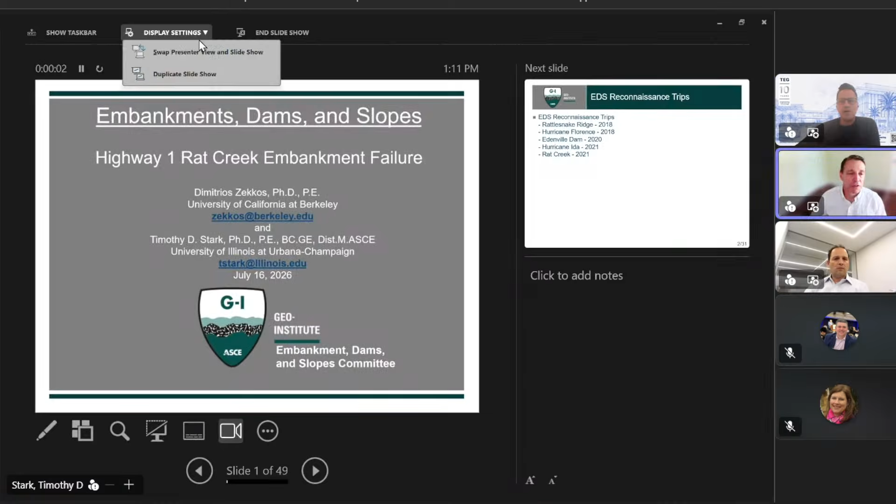Okay, I'm going to start off and give some introduction, then turn it over to Dimitrios, and I'll come back at the end. So here we go, Highway 1 Rat Creek Embankment Failure.

As I mentioned, the Embankment Dams and Slopes Committee started conducting reconnaissance trips when I was chair of the committee. Our first trip was in 2018 to Rattlesnake Ridge near Yakima, Washington, still a very active and large landslide. Next was Hurricane Florence in 2018, Edenville Dam in Michigan in 2020. And I think, Dimitrios, you were also involved in that one too, right?

Yes. And then in 2021, Hurricane Ida, and also in 2021 the Rat Creek embankment failure that we're going to talk about today. So that's how we got into reconnaissance trips through the EDS committee. We were really focused on embankment, dam, and slope case histories, and Rat Creek is one of those.

Okay, so here's the outline for the presentation. Right there, 2, 4, 6 bullet points. And here's the cover page of the GSP.

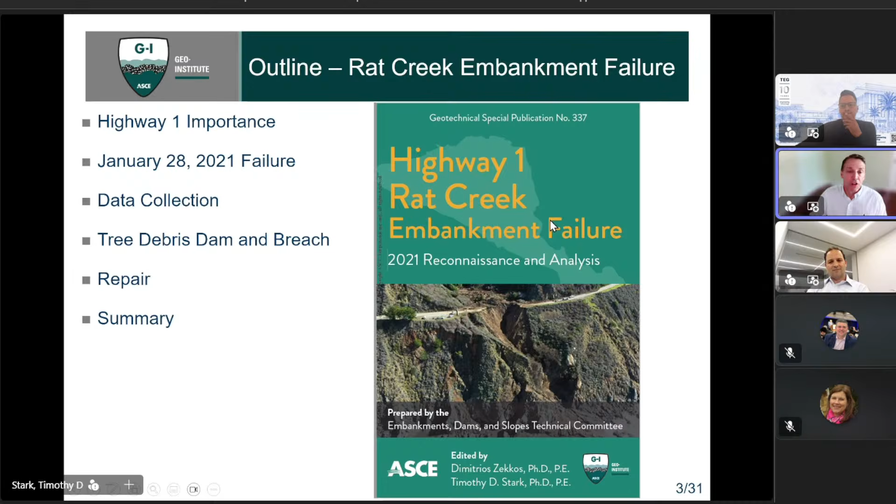So one reason we were very interested, I was working on a project with the USDA on cascading hazards, and I think Dimitrios was also working on similar topics. And Rat Creek presented a unique combination of cascading hazards, and started with the Dolan fire right here in red. And then after the Dolan fire came a large precipitation event called an atmospheric river.

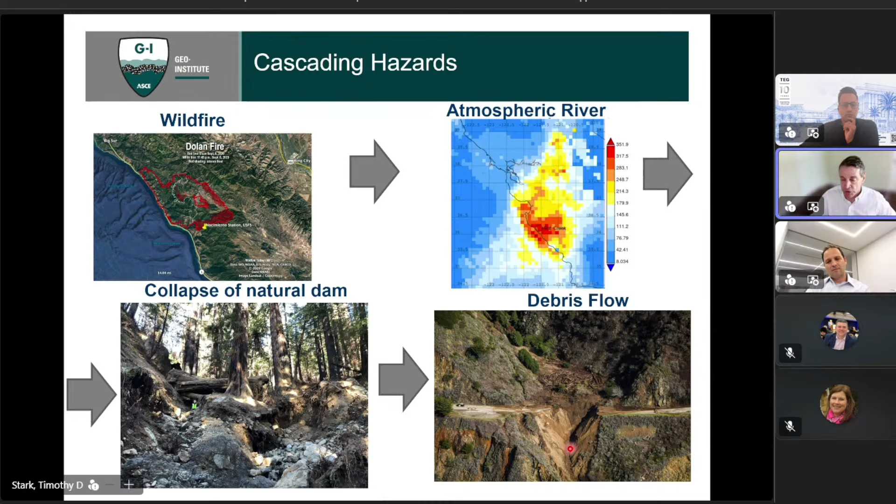And that led to collapse of a natural tree dam, which Dimitrios will describe in more detail, but you heard that right, a tree dam. And the breach of that dam led to a major debris flow overtopping Highway 1 and eroding the embankment supporting Highway 1 you see in the lower photo. And so, Dimitrios, I'll turn it over to you.

Sure. Yes, absolutely. So this is the team that contributed; we're the two presenting today as the co-leads of that report. But everybody that you see here participated in the field. I'm not going to mention them by name, but you can see them, and they contributed to this report. And it is a team of engineers and geologists and also representatives from Caltrans, Ryan Turner for sure, a number of students also. And so what you see today is kind of the outcome of all these people's work.

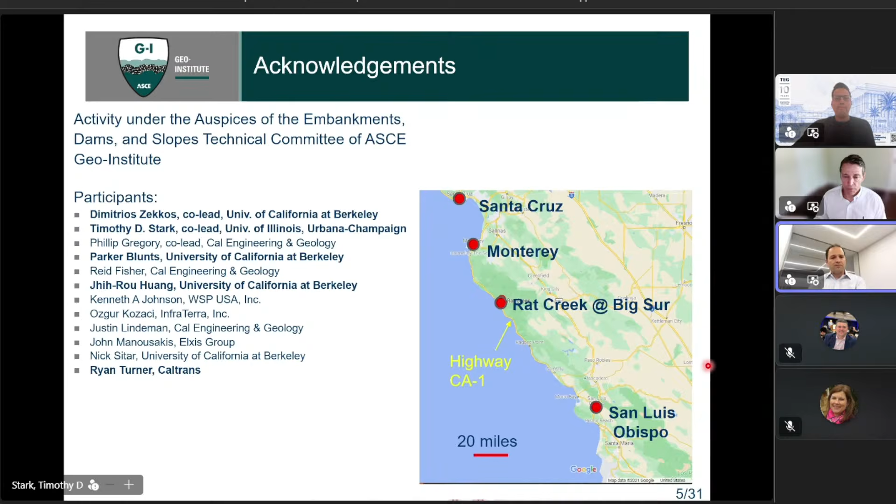And this map also has the location of Rat Creek, basically along Big Sur on Highway 1 between Monterey and San Luis Obispo. Yeah, I can go to the next one maybe. And feel free to jump in on any of those.

But talking about what we think we see versus what happened. On the top right is the figure you will see in CNN and other media when the failure happened. And when I saw that, I thought I was looking at a wedge failure, the type of thing we see in rock mechanics, and said, "Oh, that's a fascinating wedge failure." Had nothing to do with what actually happened in the end, as Tim kind of described. And we know that for a fact because there are photos actually.

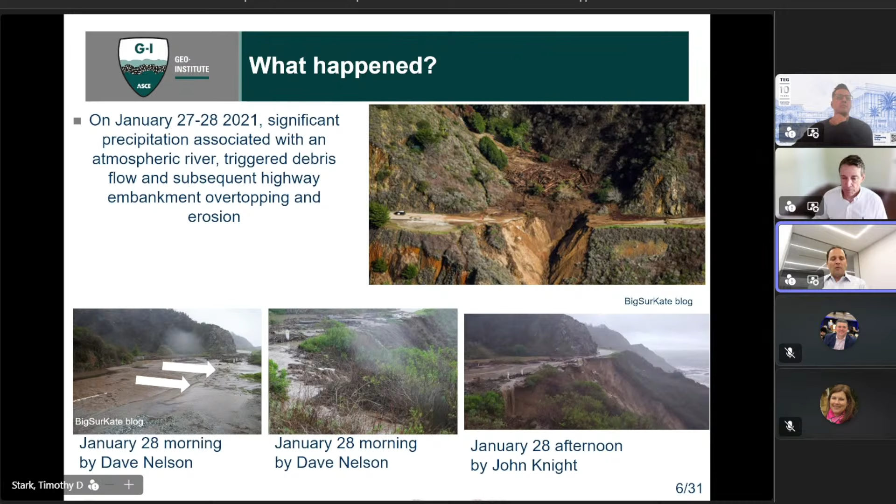As we started getting involved, there were photos of the overtopping of the embankment and the gradual washout. So we have a number of photos as the roadway was washing out; as the rain fell on top of the embankment, it was eroding it gradually. And the photos at the bottom show that. The next slide. Yeah, and these photos are showing actually the erosion. Yeah.

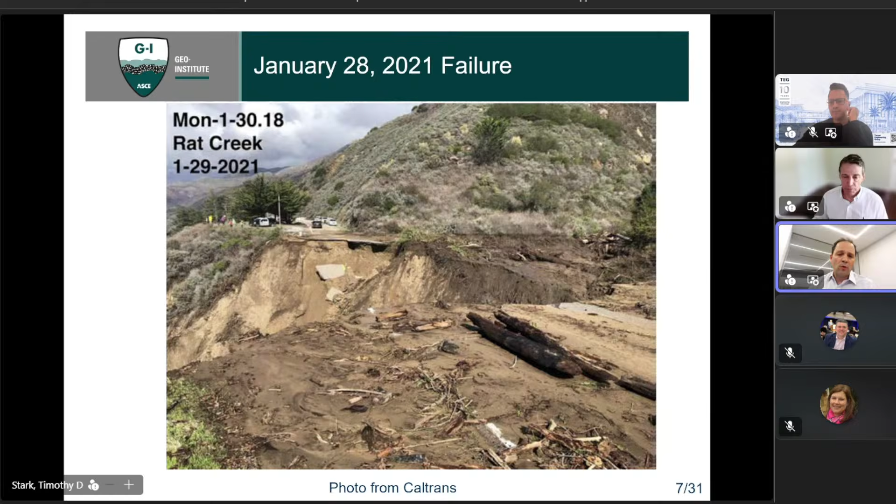And so these are just some more pictures. This is what you will see afterwards. This is a photo from Caltrans after the failure. The next slide also shows another view of that. And then as you get closer, you can clearly see the erosion marks. You can go to the next one.

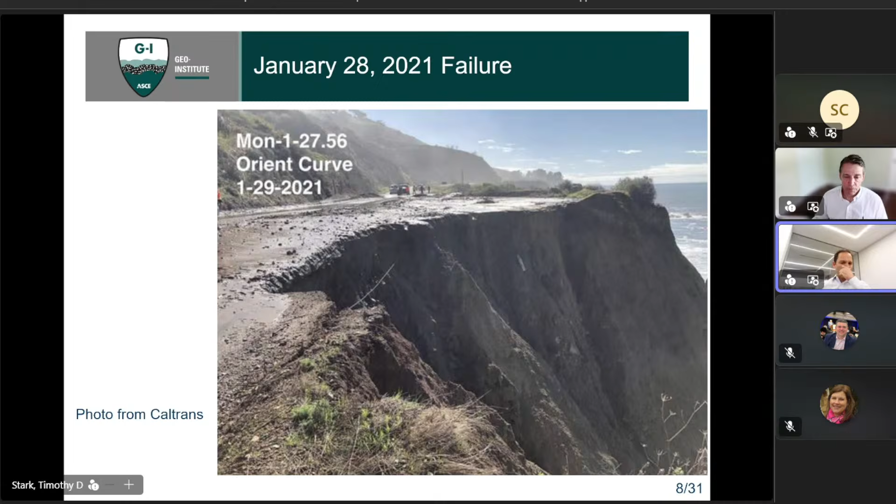And this is like the overview. So if you start paying attention back to this photo, which, as I said before, looks like a wedge, there is all this debris in the back of that washout. And you may not have noticed, but there are all these wooden tree trunks that really piled against the road. And that's definitely part of the story. So we'll talk about that next.

So if we go to the next slide, the first thing we did was to understand what failed, what moved, what happened. These are techniques that we extensively use nowadays: we basically used UAV structure from motion and some pre-existing LiDAR data. So there was LiDAR data before the event.

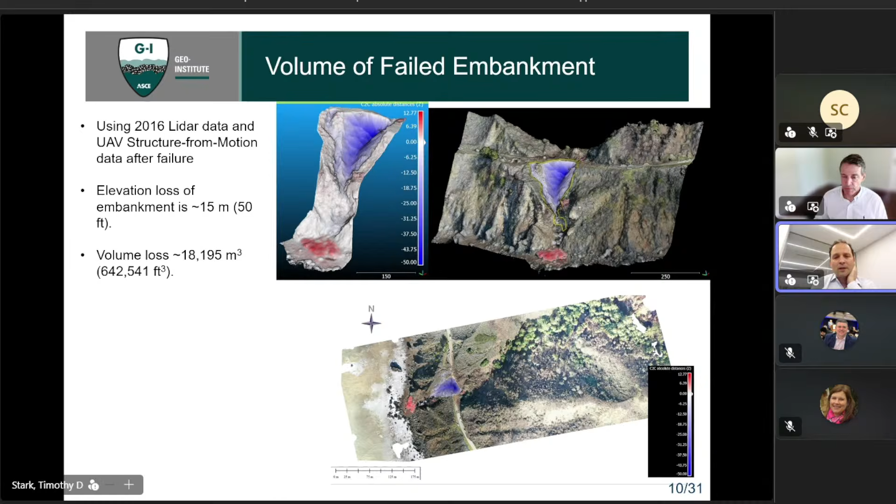And if you take the difference between the 3D models created by these two techniques, you can actually calculate volumes and dimensions. And so you can definitely see there was significant elevation loss and a total volume loss of about 18,000 cubic meters. And that's what we measured. So that's the facts. And then if we go to the next slide, we can see some of the specifics about what happened that day.

Basically, Highway 1 is clearly closed. Both lanes are completely gone. The highway remained closed for 85 days before Caltrans was able to fix it. And frankly, this was an impressively fast repair in my mind. It did cost, though, $11.5 million. It resulted in a significant detour. You could no longer cross over on that highway, and so that's significant.

And as Tim said before, we knew already that there was a fire in that area. The fire actually had stopped a few months before that event. The presence of a fire-affected area hints at increased water flow and potential triggering of debris flows, overall due to the lack of vegetation and the damage done.

And at the end, the culvert that was below the highway was damaged, and we'll talk about that. And without the presence of that culvert, without the operation of that culvert, the water ran on top of the embankment and started the erosion.

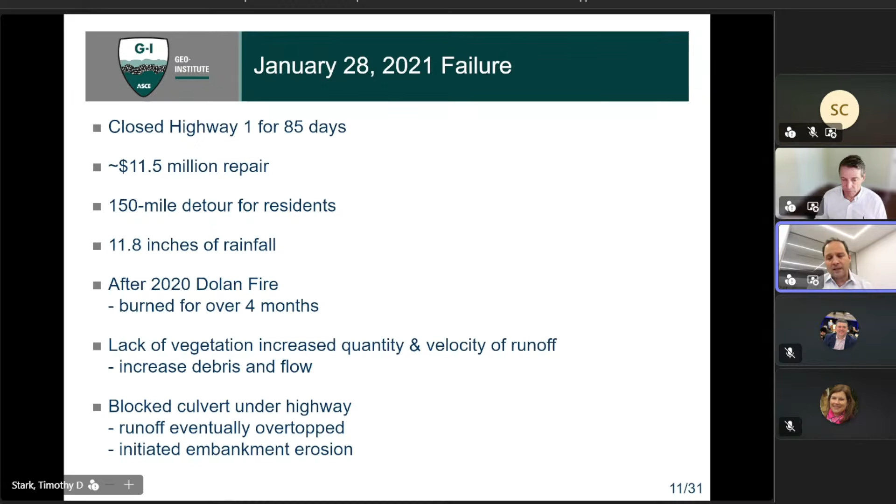But if we go to the next slide, the story didn't start on that day. It's as Tim said, we presented it from the beginning as a cascade, but it wasn't immediately clear at that time, right? And so it's important to think about this when we have an event like that. How rare is it, and did that happen before?

And one thing that had happened in that exact location was in 1985, there was another wildfire, the Gorda wildfire. And actually that one triggered a debris flow at that location. And that debris flow buried the existing culvert that was 66 inches, a very large culvert that was completely buried by that debris flow. That's 1985. And then, you could try to dig everything out and repair.

That's kind of expensive. At that time, Caltrans said, we're going to install a vertical riser, which is 36 inches in diameter, so smaller. And we're going to actually not dig that stuff out, but let the water drop through the riser and find the culvert that is buried. And we will get back to fixing this. In fact, Caltrans had a plan to come back to that location and do what they call a permanent fix. But of course, the events of 2021 happened.

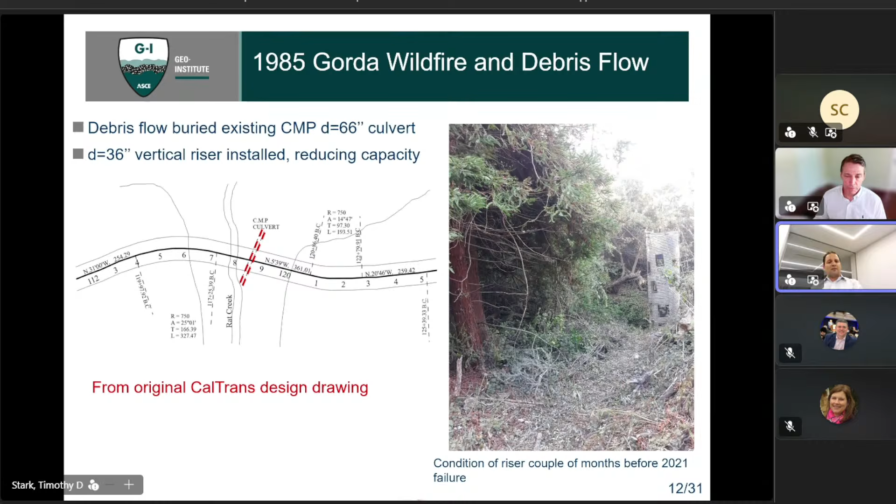And we have actually a photo of that riser just before the failure. It was operational. And so this is the 1985. We go next slide. Fast forward to 2020, the Dolan wildfire was in the news. That was a huge wildfire, covered a very large area, 500 square kilometers. And Rat Creek is on the top left of that affected area, and it was partially, not fully, but partially burned by the Dolan fire.

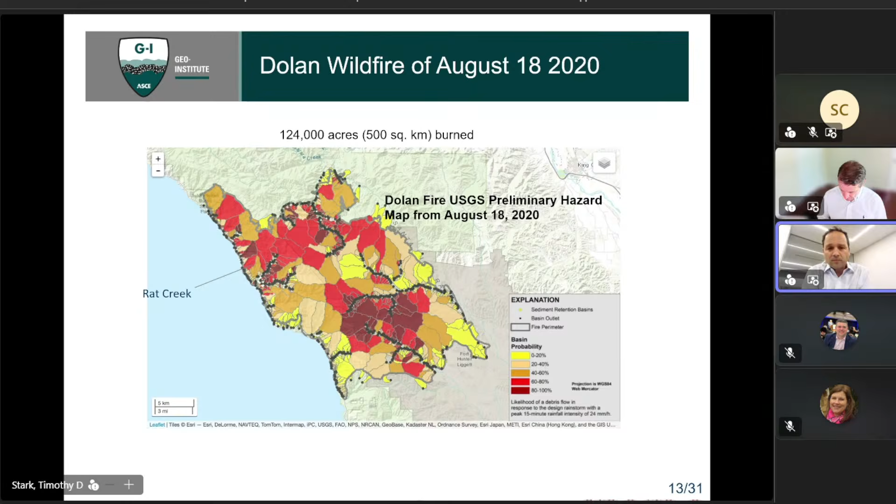And so the event was huge. That happened on August 18. The fire was burning actually for several months. I believe it was controlled in December of 2020. 2 months later, and the next slide, we have an atmospheric river. The atmospheric river is a storm event that affected that area. That atmospheric river stalled on top of this exact location of Rat Creek, south of Carmel.

And we have precipitation data. There's 2 stations that are relatively nearby, plus the IMERG, which is a precipitation data set from NASA that really gives us information about the amount of water that fell on that area during the January 27 to 29 atmospheric river. It's about 300 millimeters, so about 12 inches that fell within a couple of days. And we have a very good time history of that.

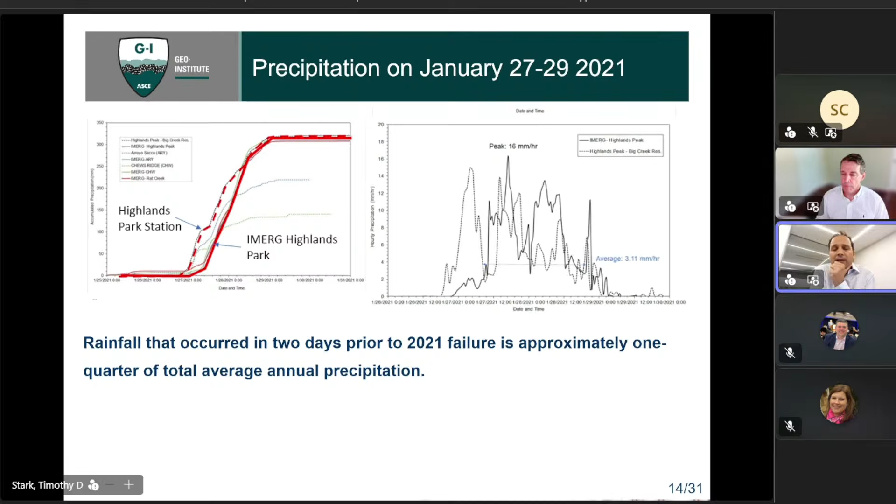That precipitation, if we go to the next slide, fell on top of the wildfire affected area. And so our job was to actually go there and collect data and see what happens. So we can see a few pictures of the data we collected in the next slides.

So the one thing to recognize, and I think it's important from a resiliency perspective, is that in this case, the roadway is on the receiving end of all the action. Things are happening upstream from the highway, and the highway has to be able to handle those. And so the story of resilience is not just about where the highway is, but also all the area that leads to it. And we know that philosophically, but sometimes it's easy not to remember all that part.

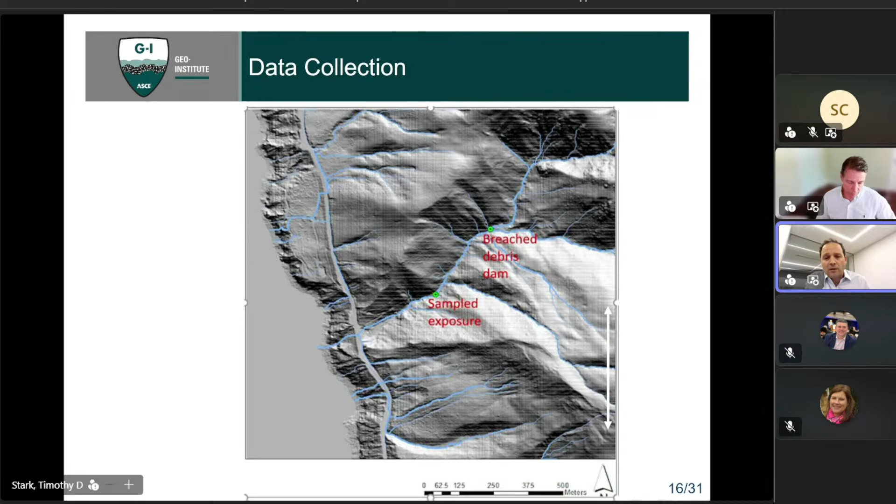So when we visited the area, we started from the highway and headed upstream, basically, to see what happened. As we said, we knew there was a debris flow, and we started heading upstream. So the next slide will show that. This is the heading upstream. This is the highway and the debris flow. We can already see it.

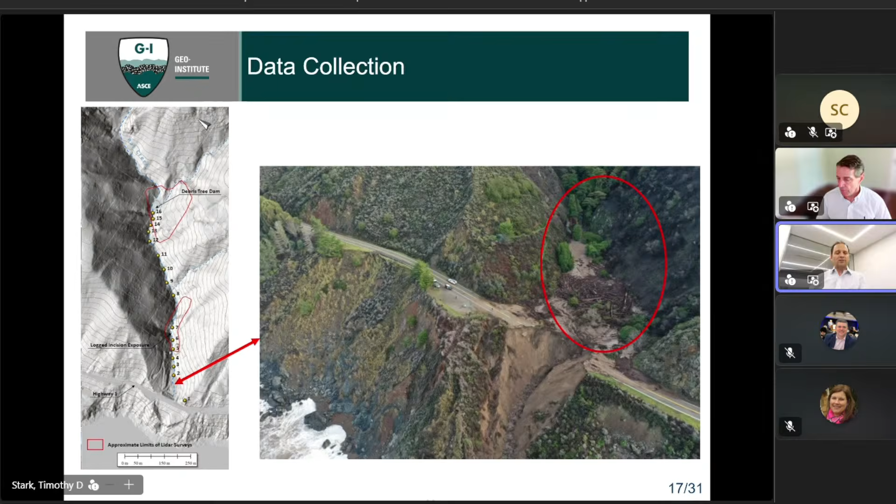The figure on the left shows in the report various stations. We walked all the way to the beginning of the debris flow. And if you do go through the report, you will see lots of pictures about what we have for each of those places. And we have a few slides of that. If we go to the next slide, we're going to start walking upstream of the area. This is very close to the highway, just above where the placement of all the debris came in.

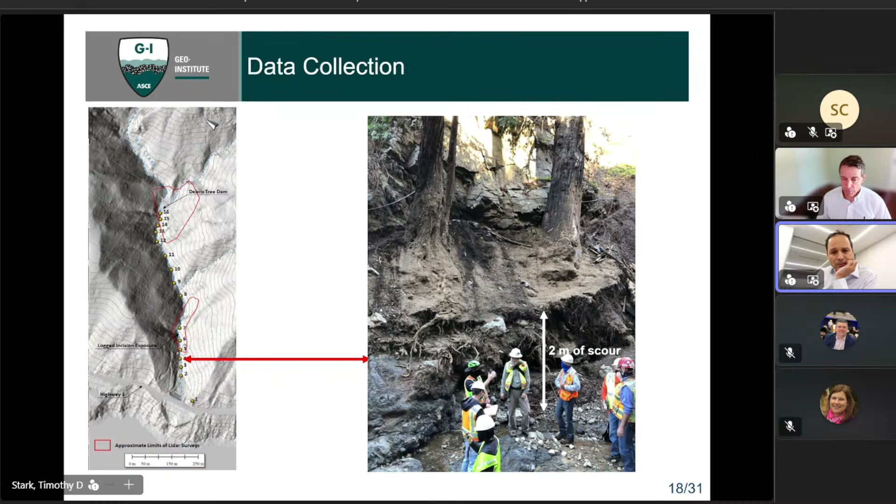And you can already see a 2-meter scour zone, a significant 6-foot scour that took out material from the debris flow. You can see also a cleaned rock at the bottom, the Franciscan melange that is down there, and it's actually very, very visible. So the debris flow took out everything that was placed, the soil that had been naturally placed there. A bit further upstream, if we go to the next slide, you can see another location, a similar story.

There is, again, about a 2-meter, 1.9-meter scour. And what is really interesting to recognize is that we are there after everything has happened. But there is evidence of what was happening in stages in between that phenomenon. You can see, not permanently, but during the storm, submerged portions of this whole area.

And we calculated there was about 3.6 meters of water that was completely overflowing the whole area on top of that scour. And then there were additional several meters where water was splashing. So you can imagine being in that area at that time, very, very scary and very, very high energy and intensity. And we're only seeing the evidence at the end.

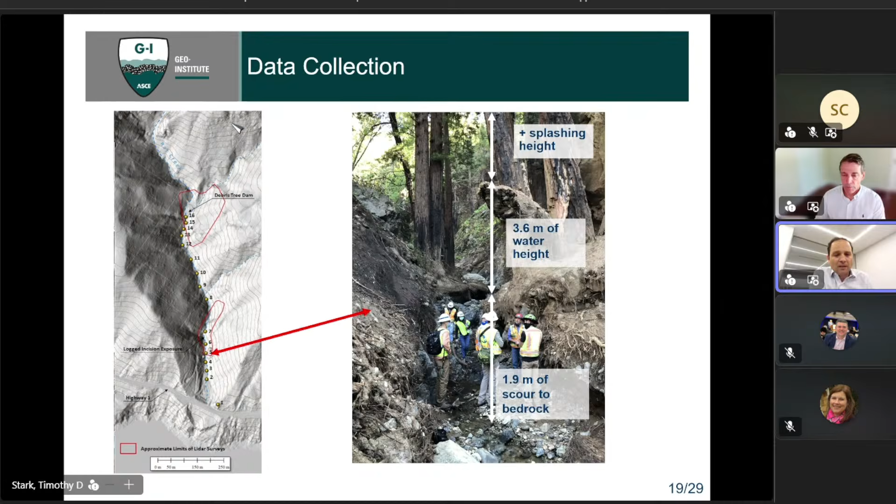Next slide has another station where we were looking at this. This is an example of another place where you can see a tree trunk possibly could have fallen during the storm, maybe not. We don't know exactly, but what we do know is that it was completely submerged. There is evidence of water all over it, and there is debris against it in some places. So we know that this tree trunk that is up there was at some point below water. Next slide.

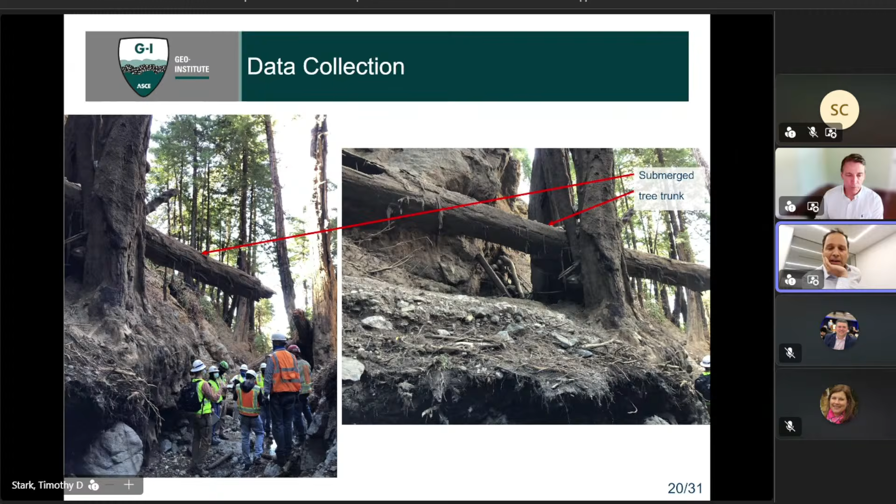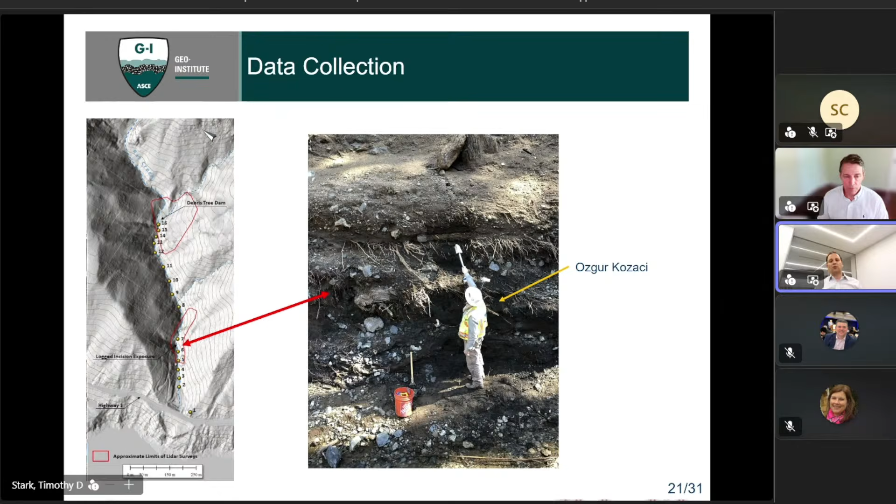This is another station. This is Ozgur Kozaci, one of our team members, a geologist, who did a really great job in mapping. Once you have this section of the soil that has been removed by the debris flow, you can go on the sides and map to see what the story of the soil stratigraphy is. And he did a great job on that. The next slide describes some of his work. We did carbon dating to see the different horizons and how old they are.

I think there are two main lessons from this. Number one is that we found repeated soil horizons, repeated places where there was burned material. So the 1985 fire was not the first wildfire; we have a record going back almost 300 years, and we can see wildfire-affected ground. We could also see flood events, and we were able to date those. And there is a pattern to this.

The most recent flood events are about 36 years apart, which seem to be faster compared to previous flood events. And we can discuss what that means. But maybe we can go to the next slide.

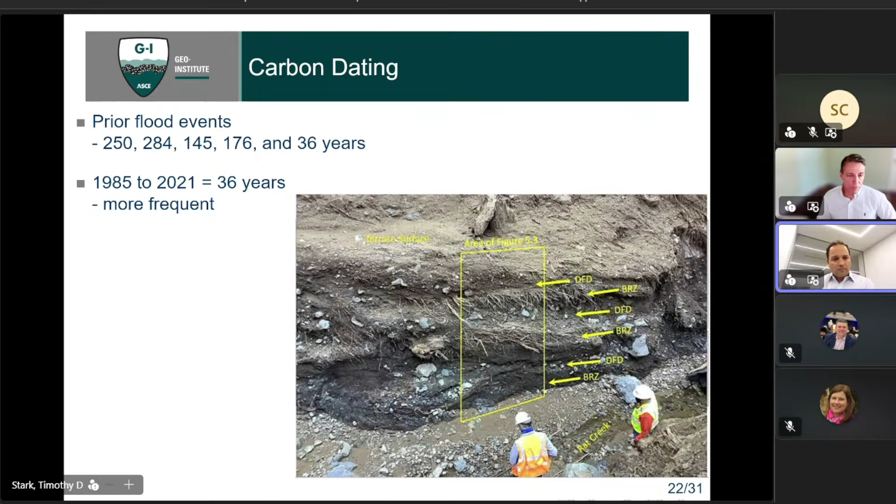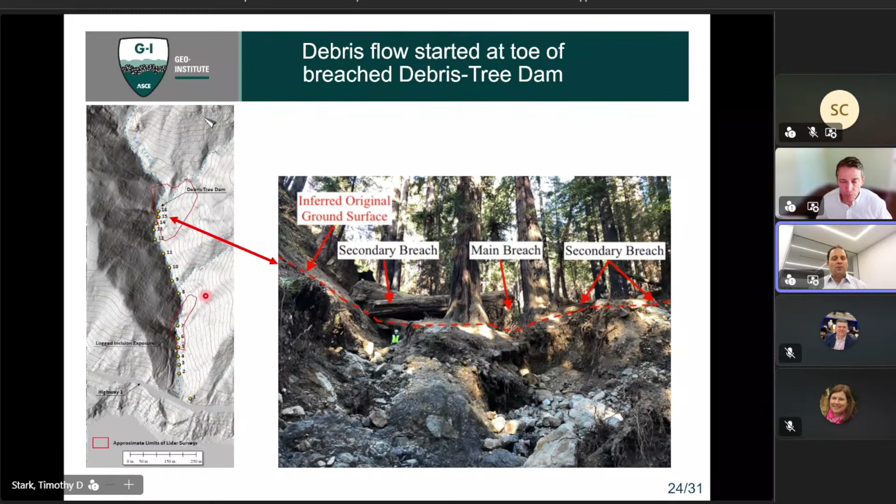As we walked up the debris flow, we wanted to go to the beginning of it. We thought we would find a typical scar of the initiation of the debris flow, but that's not what we found. What we found was a naturally placed tree debris dam. Tim, you can go to the next slide. That tree debris dam was pretty big. It was damaged by the time we reached it.

This is a picture, if you can see it. We're going to have some annotation. But it was damaged, so it was broken. And the location where it broke is exactly where the initiation of the debris flow is. You can see already here some of the tree trunks. Maybe the next pictures will make each of those a little more visible.

But what you can see here is at least 3 different breaches: the primary, main one, as well as 2 places where water was definitely flowing below the dam, but that were not the main place where the dam broke.

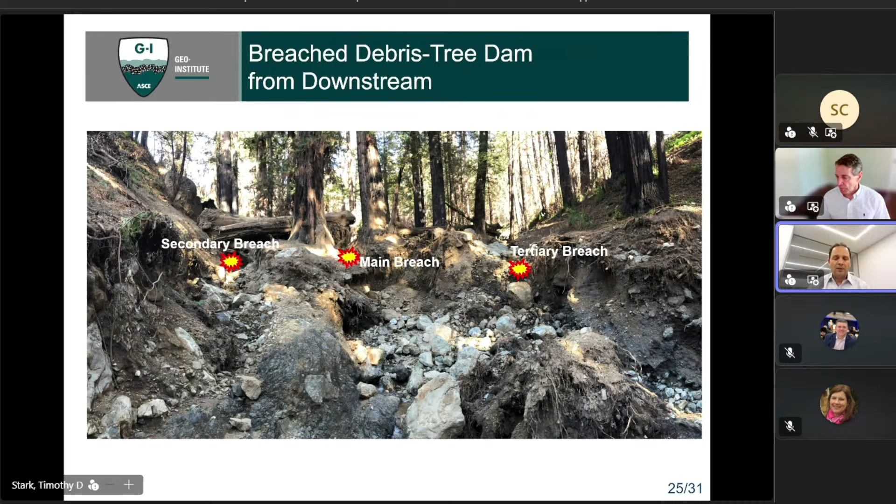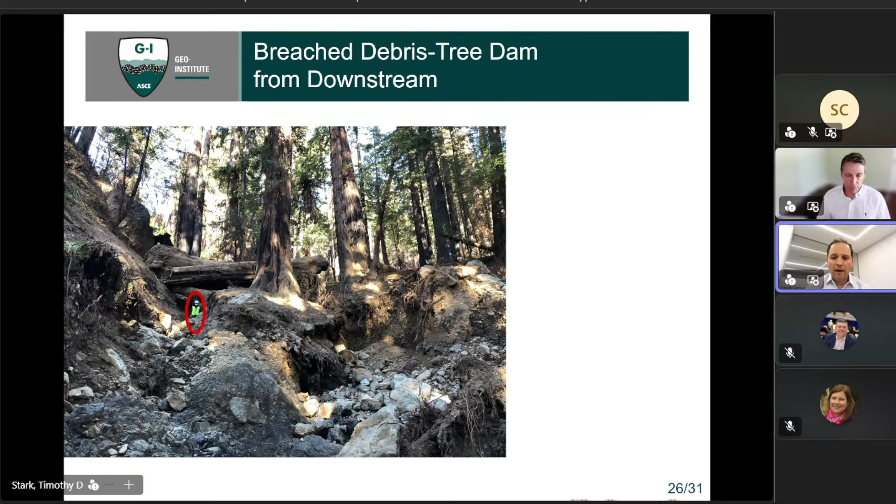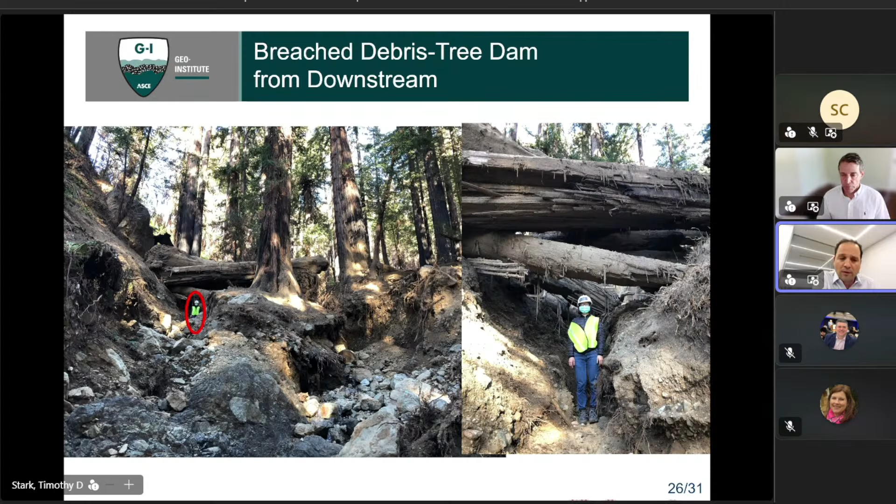Maybe the next slide will have more photos related to this. You can see here a close-up view of some of these tree trunks, some of them easily reaching 1.5 meters in diameter. And Jiru is standing in one of the secondary breaches, not the primary, where the water has flowed below the dam. Next slide.

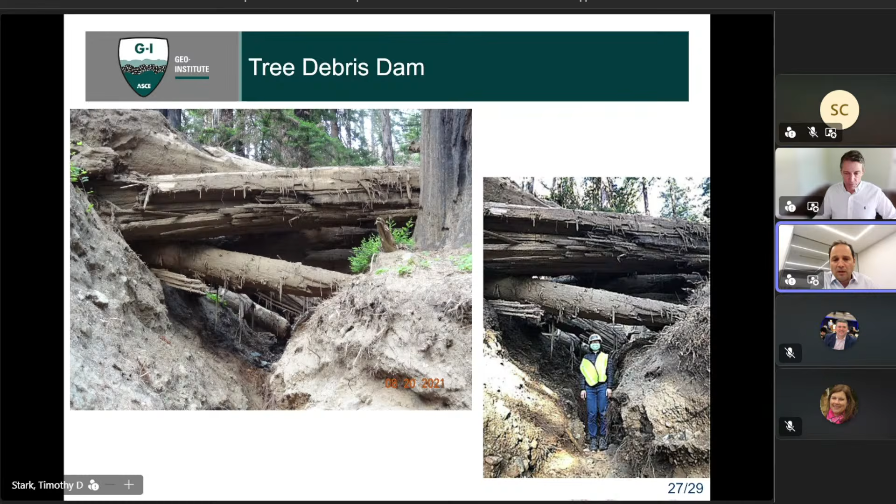These are additional pictures that maybe give you a better sense of the dam. It's easy to think about how much energy would have been necessary to really break the dam in the main location where it broke. Maybe the next slide.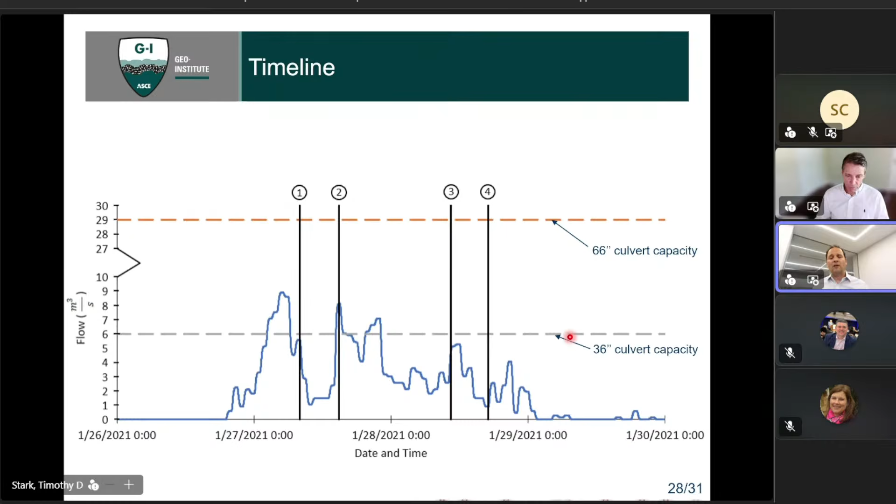And what you see here is the capacity of the original 66-inch culvert, what it could handle, the orange, that no longer was operational. But you can also see with the downshoot, the riser, the 36-inch capacity. So in a perfect world, if all the water was below the culvert capacity, we would have no problem. And we have a problem. But the reason is not actually that the 36-inch culvert capacity was a bit too low for that event; if you can click the next theme, it's really that the debris flow took out the culvert.

And so already we know by that time that the culvert, the riser, no longer exists, so there is no capacity. And so from that point on, if you click again, Tim, the water is rising. We know it rose by 10 feet between 8 o'clock in the morning and 3 p.m. There is a witness actually that provided this information. And so at that time, it's still below the highway.

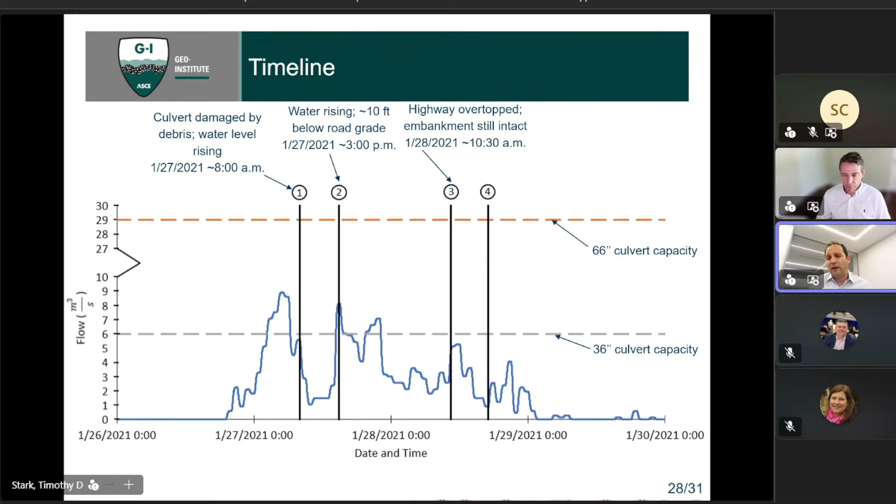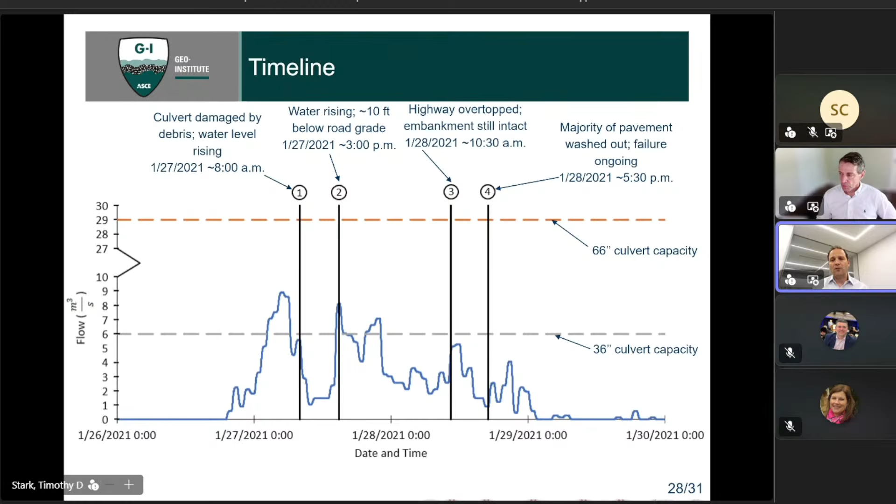The next day, because the storm continues, the highway is actually overtopped and the embankment is still there. And if the storm had stopped, maybe that would be the end of it. There would have been no failure. But the storm continued. And then if you click one more time, Tim, thank you very much. You will see that by that time, the embankment has completely washed out and the failure is as you know it afterwards. And so I think that's the whole story of this failure as we documented in this report. Tim, next slide is on you.

Yeah. Okay, so I'll wrap up with the repair. As Dimitrios mentioned, it's about $11.5 million. And a couple of interesting features. First, the fill was placed back in the V that you saw in the beginning. And this was really challenging. You can see this dozer trying to go up the slope and compact the fill at a very steep angle. That's really impressive to drive a bulldozer up that steep slope.

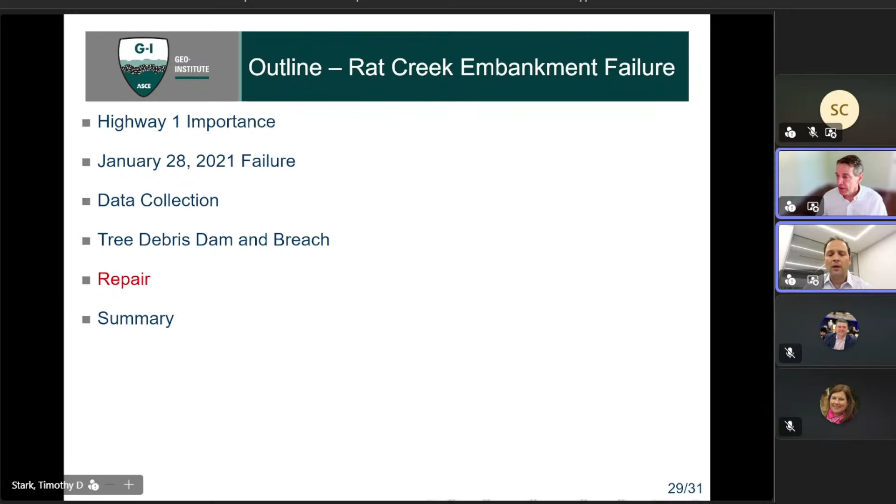Tim, I think you need to change the slide. I think I'm seeing. Okay, it came to me. Yeah, I can see it now.

Okay. So here's the bulldozer going up the slope, and you can see how steep the angle is on the fill that was placed into the V to bring the highway back up to grade. Here's a photograph. There's the filling in the V and new pavement across the top. In addition to that, Caltrans added a couple of other important features. The first is a row of W24 steel soldier piles that you see right here. These are upstream of the highway. The highway is right here. And the culvert, which I'll talk about in just a minute, is right there.

So the idea of these steel soldier piles is to stop the debris and the big trees from reaching the culverts and damaging them. And so it'll be interesting to see if these steel soldier piles are able to withstand the force that's going to come down Rat Creek with these large trees. So in addition to the piles, you can see there are a number of culverts now installed. First is the main culvert, which is 3.1 meters in diameter.

So one large culvert, but now there are some secondary and emergency culverts in an effort to prevent overtopping of the highway again, and then erosion of the fill on the downstream side of the highway. So first is a secondary culvert that's 1.5 meters in diameter right here. There's a car on the highway right there. And then two smaller emergency culverts. So if this all fills up, these two emergency culverts, 0.6 meters in diameter, will hopefully transmit enough water under the pavement such that the highway isn't overtopped. So several pieces to the repair.

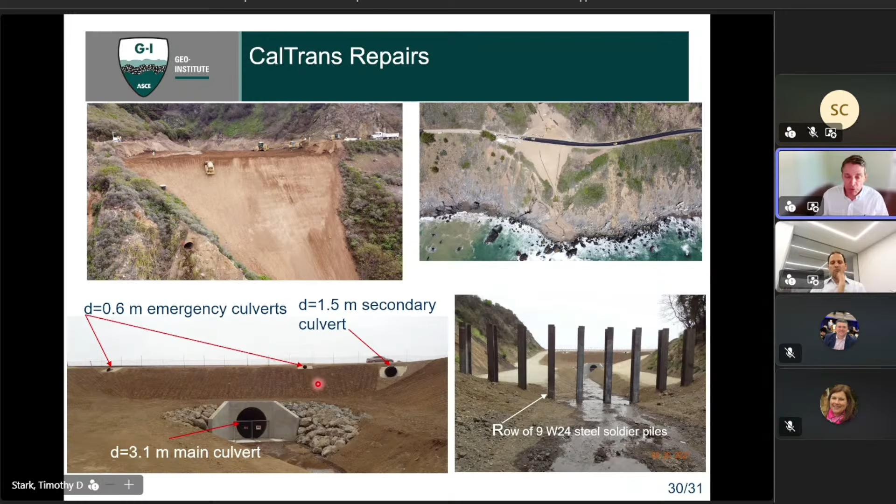Okay, that's our last slide. Oh, sorry, summary. Floods are becoming more frequent there. As Dimitrios mentioned, there's only 36 years between the last flood and the one in 2021.

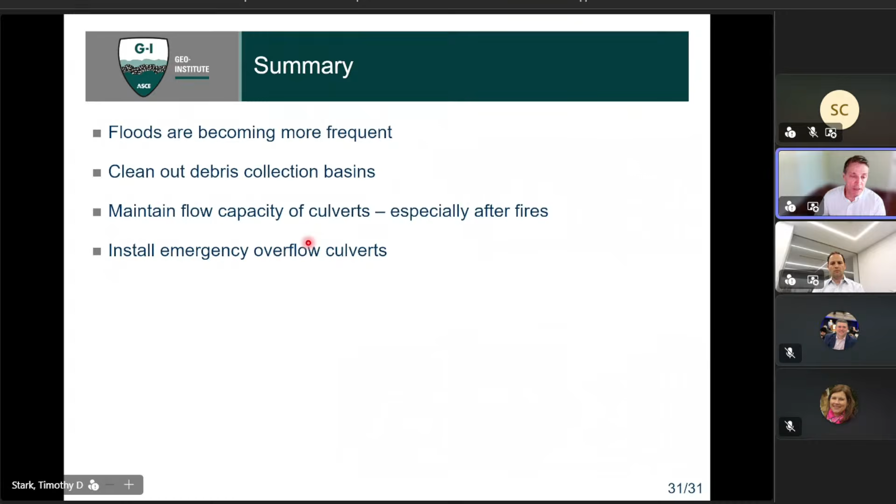Clean out debris collection basins as a maintenance activity, so a lot of material does not build up in the basin, and the capacity remains available to handle a future debris flow. Maintain flow capacity of the culverts, especially after fires. And maybe those steel soldier piles will help with that by trapping a lot of the large debris further upstream. And install emergency overflow culverts as Caltrans did in an effort to prevent overtopping of the highway.

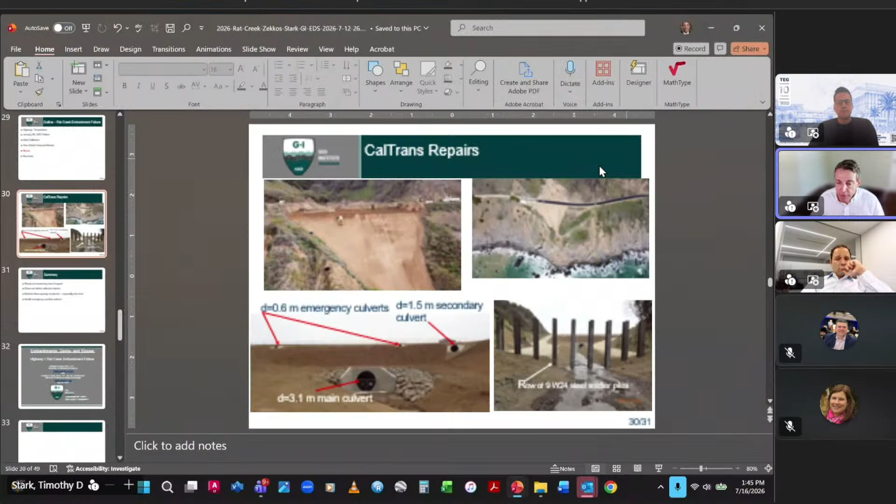Let me see if you can see it on this photo. Santiago, can you? Yeah, we can see. Can you see these black lines coming down the fill slope? Yes. Those take the flow, this one on the left from the big culvert and another from the secondary culvert. For the emergency overflows, I don't remember seeing a pipe, because they're much smaller diameter. But those black lines take the flow through the culvert and drop it below the fill material in the rock near the base of the slope, and then it goes into the Pacific Ocean.

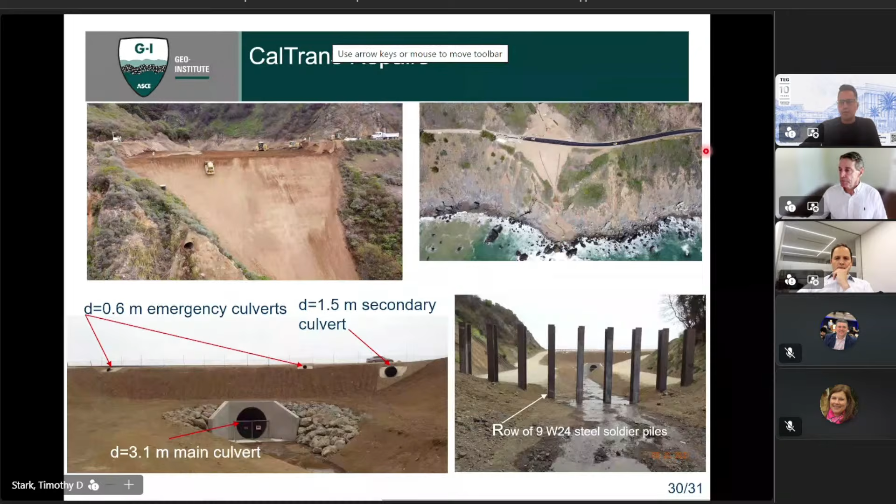Thank you, Tim. The first question was how you stabilized the steep repair slope. The picture with the bulldozer is very impressive, and everybody's a little surprised how it was done. I believe it was step by step, going from bottom to top. Yeah, just filling from the bottom coming up, and the dozer coming up the outside of the slope at the very end, compacting the superficial material on the surface. So just straight fill compaction. There are no soldier piles or anything in it. Perfect. And then there's another question.

Were the subdrains installed within the fill zone? Were there any subdrains installed within the fill zone all the way? I think the pipes that are just coming out, I think that's what the question is. Not that I know of. They started placing fill from the bottom up, and it's just the primary culvert or main culvert, secondary culvert, and the two emergency culverts. And then that brought up my question, because I see the location of a secondary culvert and the two emergency culverts, the smallest ones.